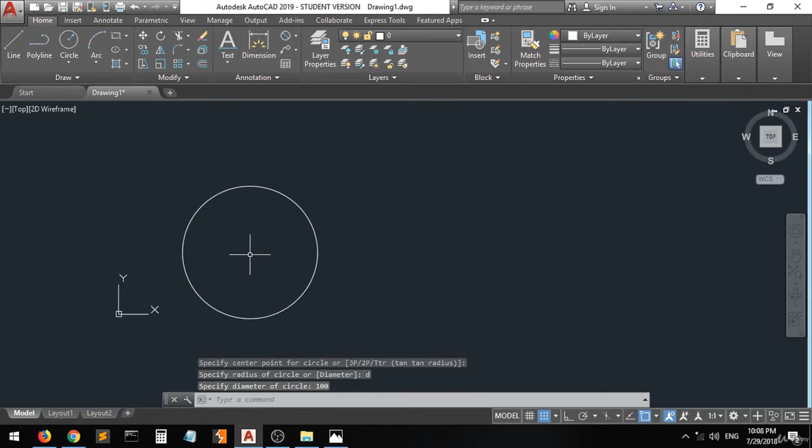As you can see, this circle here has a diameter of 100. Let's start working from this. You'll start with this 100 circle. Click on the circle command, put D, enter, and 100. Zoom out - as you can see, we have this diameter here.

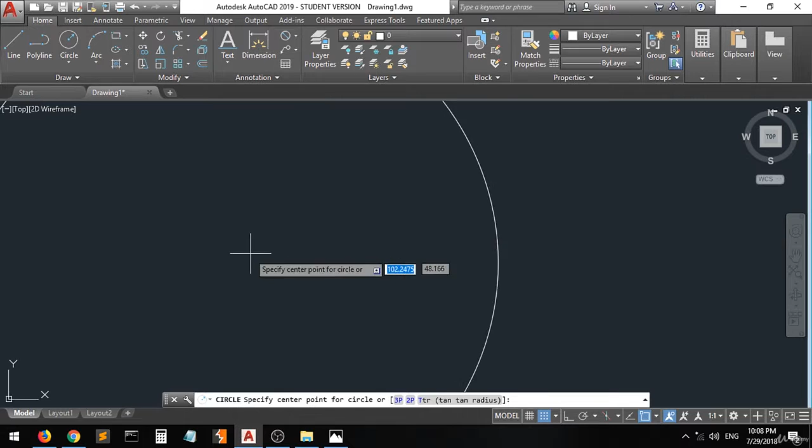Now let's go back here. We have this small circle from the same center, 25 diameter. Go back, from the same center, D, enter, 25, and then go back.

As you can see, we have some kind of arches in here, but we'll leave it for later on. We'll go for these circles. As you can see, from this center to this one, we have a 90 line.

Let's go and create a line from this center. We'll use the polar coordinate entry as we told you, at 90 with an angle of 0. Enter. And enter to intersect.

As you can see, we will create a circle with a center from this point. And as you can see, this circle has a diameter of 40. So we will type D, enter, 40, and we have it here.

Go to this one, which has a distance of 50 from this center, and with a diameter of 25. So use the line at the distance - it's 50. At 50 with an angle of 0, enter.

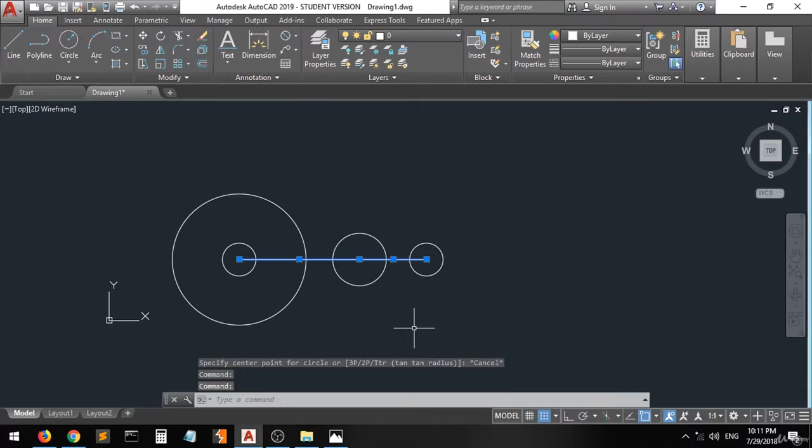Go to the circle from the same center. First of all, let's just delete these lines because they are just some kind of guiding lines, we don't need them. Go to the circle command, but now we will type R for radius. Enter. Let's put 25. Enter. And we have this circle.

Now when we go back to the whole shape, we have this kind of bigger arc, and it looks like a whole circle when we draw this line, and this part has been trimmed. So let's just draw a circle - as you can see, this outer line has a diameter of 110.

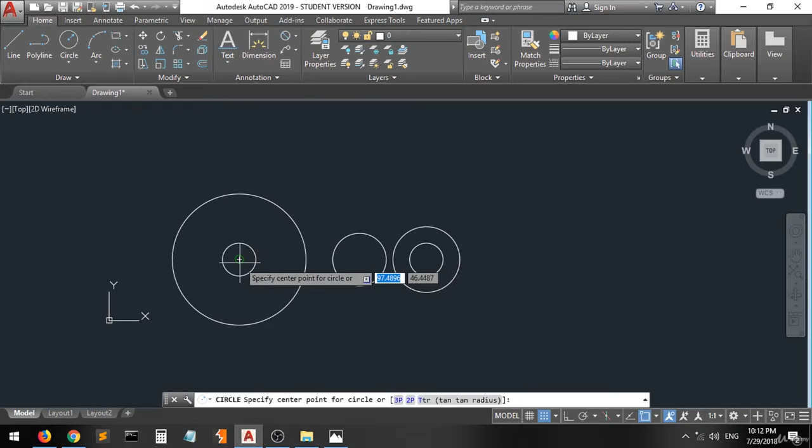Okay, so now we go for this circle. From the same center, we'll put D, enter 110, enter. And now we will create a line that has a tangent for this outer circle and this outer circle.

So we'll go to the object snap and activate the tangent option from this list. As you see, this check will tell you that this command is activated.

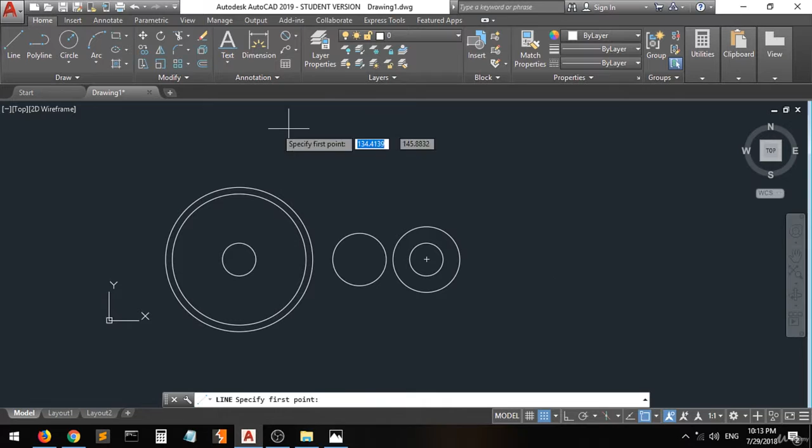So go back to the line and draw not a quadrant, it has to be a tangent. So we will deactivate the quadrant so it won't be confusing when creating the line. We'll go to the quadrant and deactivate this option. Now, still doing the same thing with the center, we'll deactivate the center.

Let's see now, as you can see, the tangent sign will be shown when you just point on the circle. So pick this one and this one, and we'll do it again from here to here - from this one to this one. Enter to end the session.

Now as you can see, this line is done. We have created this line and we have created this line. But these lines drawn here, we will use the trim command to erase these lines. So go back, let's select the whole shape and go to the trim command.

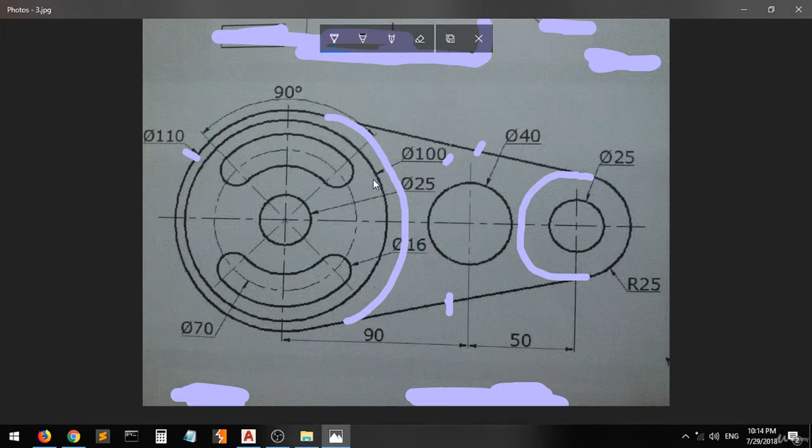We will do this and this, right? And as you can see now, this looks a little bit like this drawing, but there is some kind of missing thing. As you can see, there looks like two circles here and here, here and here, and then we have this kind of arc that connects the two circles.

So first of all, we have to draw this one, two, and this two, and then we will create the circles on the edges. Okay, they tell you that this center line of these circles has a diameter of 70. So we will create just a guideline circle of a diameter of 70.

So you go here, go to circle, and then go back to activate that center. Create a circle with a diameter D70. And as I told you, this circle will be just a guideline. Okay, going back to the shape.

So we have drawn this circle, right? Now you have to draw a circle with - these small circles, 1, 2, 3, 4, have a diameter of 16. So if this whole diameter is 16, then the radius of this one to this one here will be 8, right?

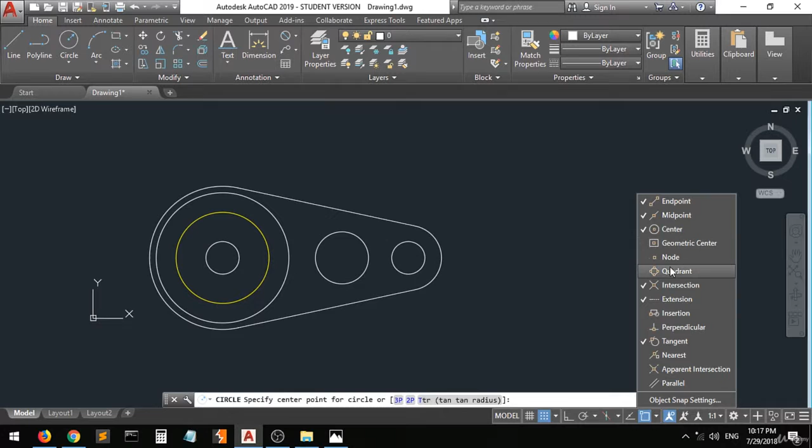Go back here, and I will change this to another color so that this won't be confusing. I will use yellow, for example. Now I will draw a circle again from this center. Go back. It's activated - activate the button and deactivate the tangent. Go back here, click on the circle, and now we will...

We will create a circle with a diameter of 78. Enter, and then another circle with a diameter of 62. Now we will create what?

We will create. Let's go back to the drawing. We have created this line and this line. We can delete the line from here, or we can use it to create. As you can see, we only have just this angle of 90 here between these two lines. So the angle between this center and this center will be 90.

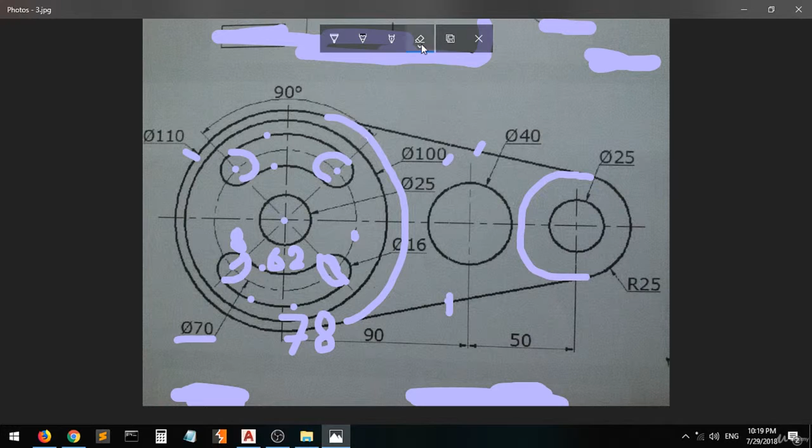So let's just erase a little bit. Okay, this is good. As I told you, we have an angle of 90 between this center and this center. So if this was 90, then this angle here will be 45.

So go here. Let's delete this. Or let's just leave it here. We'll go use a line. Create a line that has, doesn't matter, let's put it 100, at an angle of 45.

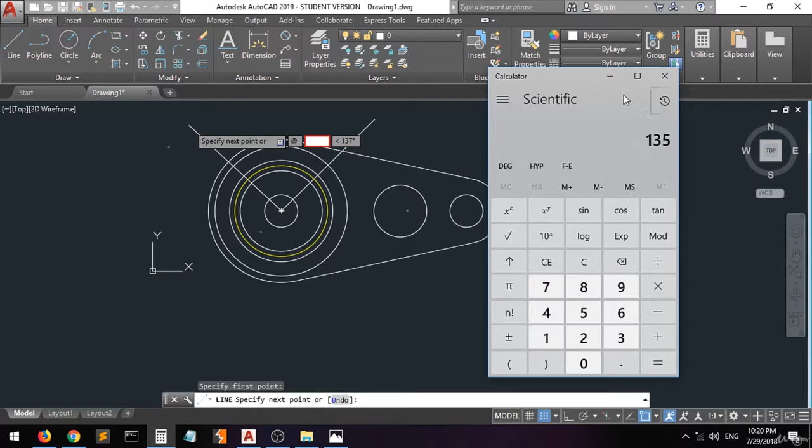An angle of, I just forgot, 135, an angle of 135. So as you can see now we have created these two lines which have an angle between them of 90, and to make sure, we go to angular between this line and this line, as you can see it is 90, and we did a great job.

Now we will create a circle from the intersection of this guideline and this guideline here, okay? And these circles, I told you, have a diameter of 16. Let's go here, do the circle from the intersection, type D, enter, 16, enter.

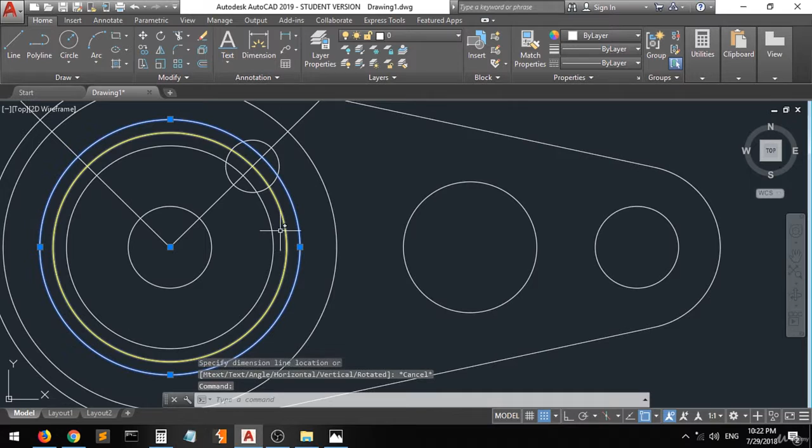So I guess we did something wrong. Go to the linear one. This from here to 8, which is really wrong. So we can delete this and this, don't need them, they just made us delete this line and go back to the circle command. As I told you, from the intersection of this guideline and this guideline, type D, enter, 16, enter, and we have the circle.

And now what will we create? I will delete this line and this one. Go back, and now we have a kind of curve that connects these two circles. We can use the curve command, or we can just draw a circle and then trim these.

Let's go and use the arc command. We will use start, center, end. Start, end, and... see the options. Start and angle. Specify the start point, will be...

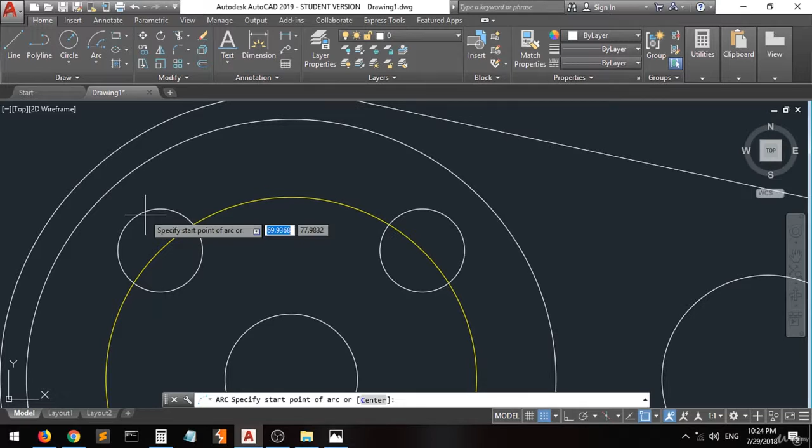Go tangent. Save this and this and activate tangent. Go here. Or we just use another one. We will use, no, we have to use this command: start, end, and radius.

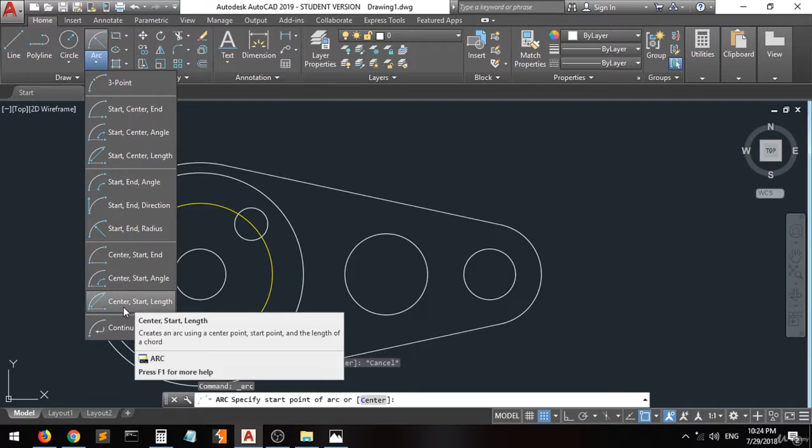Go here. Start, go, activate again. Quadrant. Go here, go to the center. Specify start point. Activate the tangent. This, and activate.

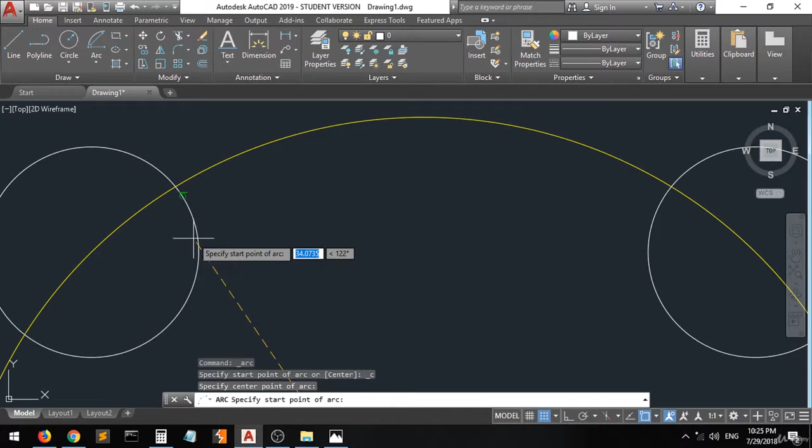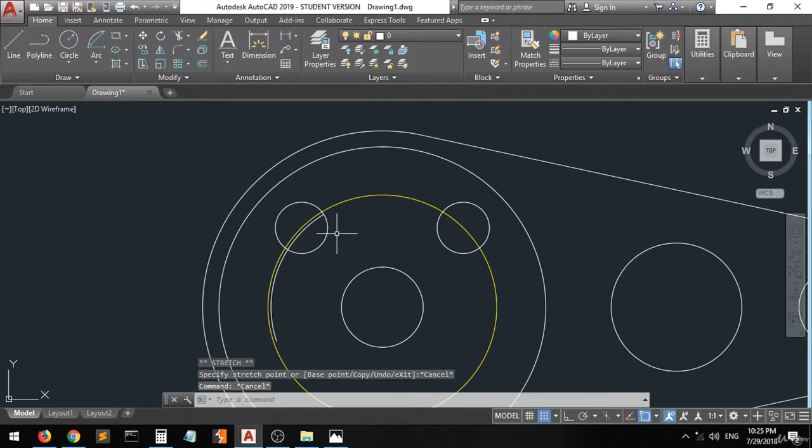Then this, this, up. There's something wrong with it. Control Z, escape, escape, Z, Control. Let's just use the circle for now.

Go again here, this one. I will make it tangent, so I can go here.

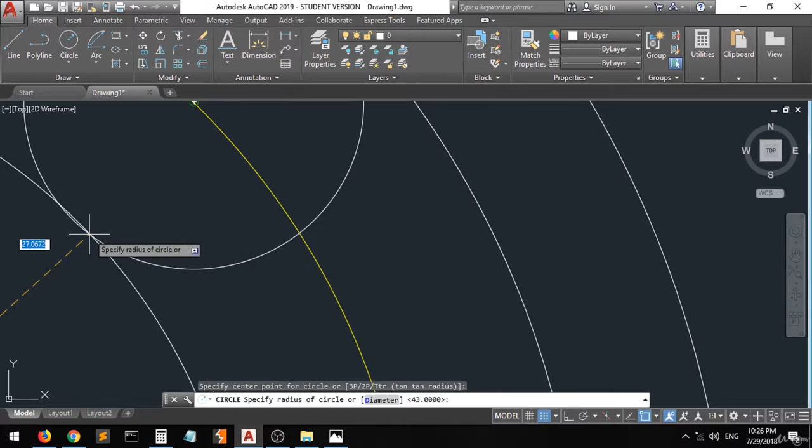And then now I will make a smaller one. Go to the circle, activate, from this center, want it to be in, want it to be not center. Go to here, here.

And now we can delete some lines. Let's do the trimming thing. Go here, select all these shapes, right click. I want to select one.

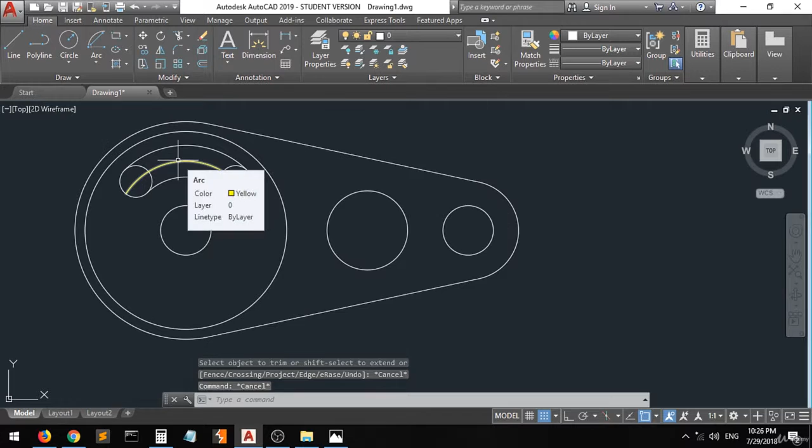And this one as well. And then I want to delete this line, and then escape, I don't need this line anymore, right? So I will delete it. And then use the trim again to delete this and this. Escape. And now we have a similar one to this one.

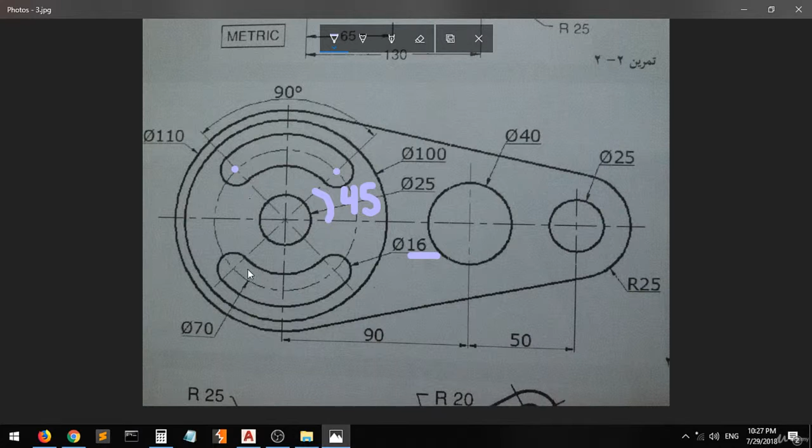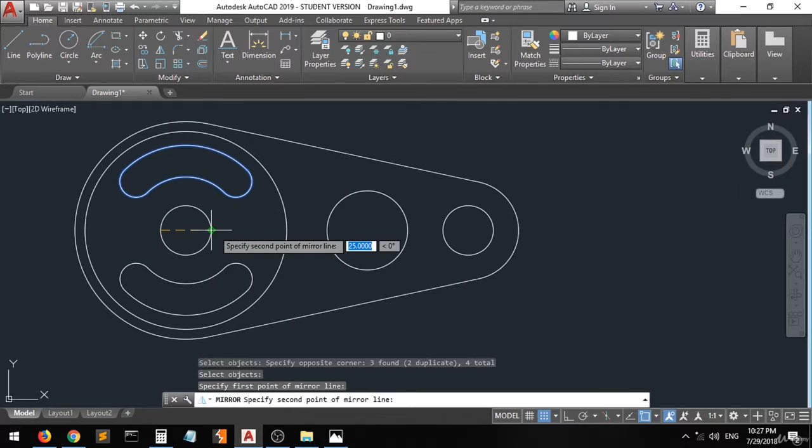And we will now use the mirror command to copy this shape from here to here. So go here, this is the mirror command. One, this, right click to find the first point. I want it to be this. Go and put the quadrant from here, here. As you can see, now we have created this shape and they both look similar.

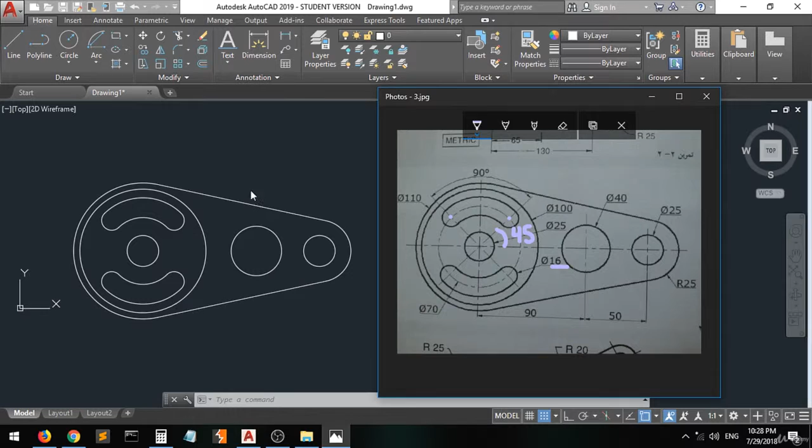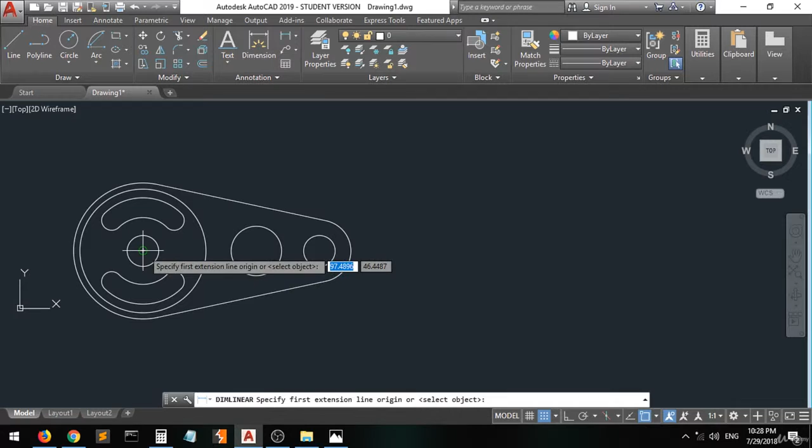And now, how about we put the dimensions and put them on layers? Put this down. Go and use this. Let's go from the center to the dimension command. Activate again, go here. 90. Again, enter.

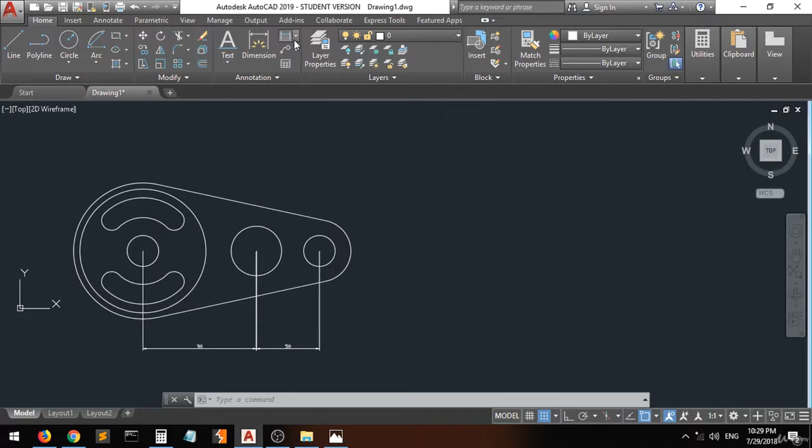50. And now we will do what? They all have radiuses, this one, this one. We will do the radius for all the shapes. So go. Let's see where the radius is.

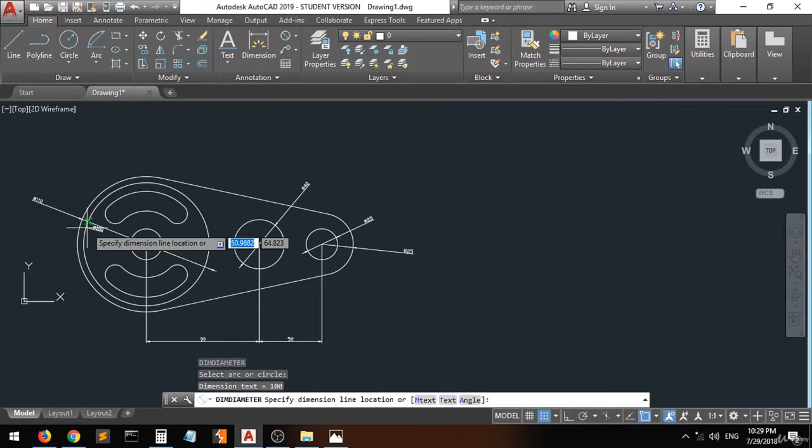The radius of this one, just on this one, so I will activate this up here, as you can see, radius of. Now go to the diameter, and then choose circle and circle, this one, this one, and then this one.

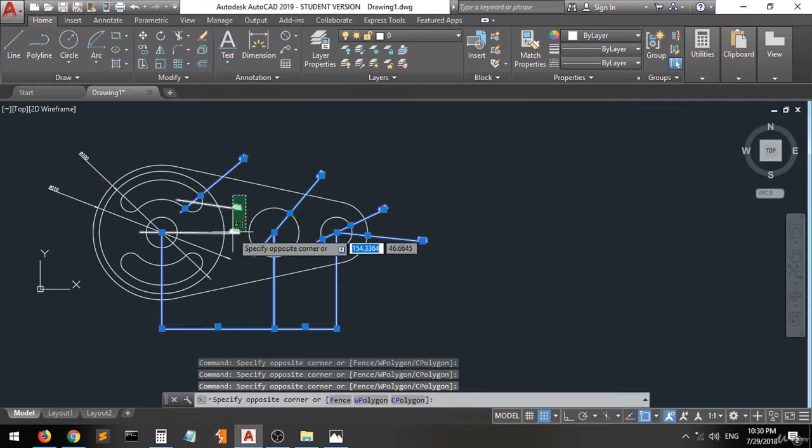Okay, close it. And now we will select all the dimensions and we will put it on the layer of dimension. As you can see now, we have created the shape with the dimension on it.